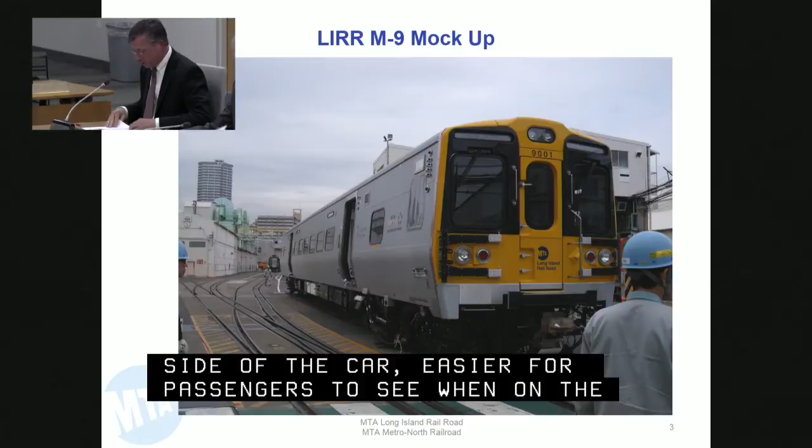Slide 2 shows the same mock-up car from the side. As you can see, it's very similar in appearance to the M7 car that Long Island and Metro North operate today.

The contract also has provisions for up to an additional 584 cars for Long Island and Metro North. Long Island's first option for an additional 88 cars is funded in the 2015 to 2019 program. The 92 base order cars, along with the first option for 88 cars, provides 180 cars that are intended to replace Long Island Railroad's existing fleet of M3 cars, which will have reached the end of their useful life.

However, because the East Side Access full funding grant agreement between MTA and FTA identified the 160 cars for East Side Access, the M9A cars will be purchased pursuant to a separate procurement with federal procurement guidelines. Metro-North will also have an option under the Kawasaki M9 contract for between 140 and 170 M9 cars, which are also funded in the 2015 to 2019 program.

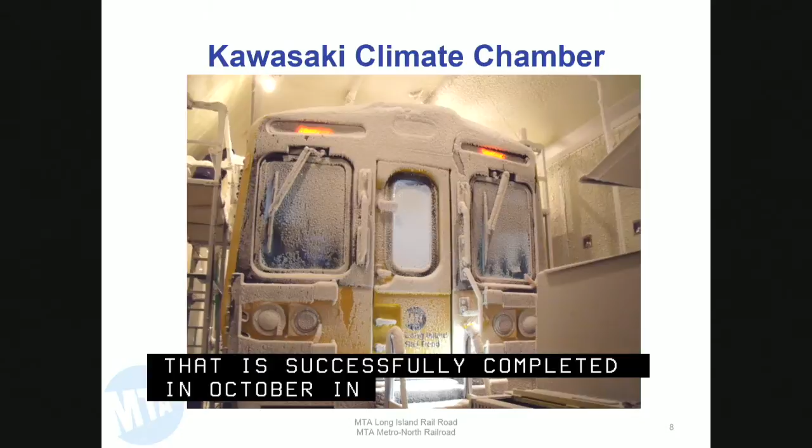Slide 7 also shows that the mock-up was subjected to a climate room test where it was covered with snow and soaked at temperatures as low as -20 Fahrenheit and as high as 105 degrees Fahrenheit.

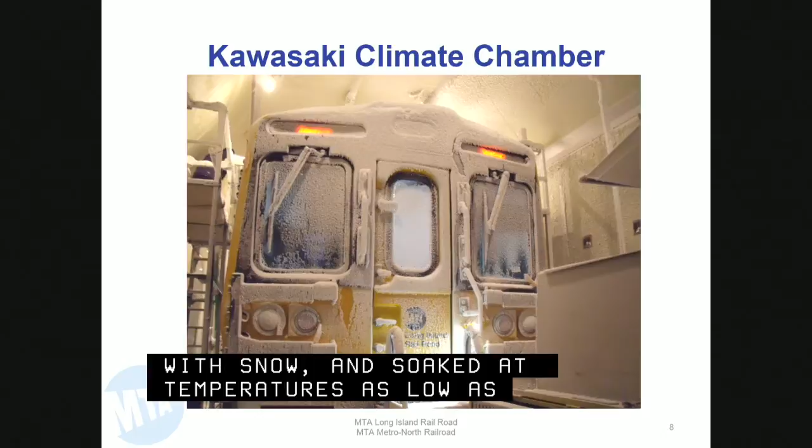Slide 8 shows the interior of the mock-up car. Please be aware that these seats are for mock-up purposes only and were only installed in the car to give it some sort of perspective of what the final design would look like. As you can see, the interior of the M9 car, as with the exterior, is very similar to the M7 design. And while close to the finally chosen M9 blue seat color selection, the colors of these seats are not exactly what the final design will be.

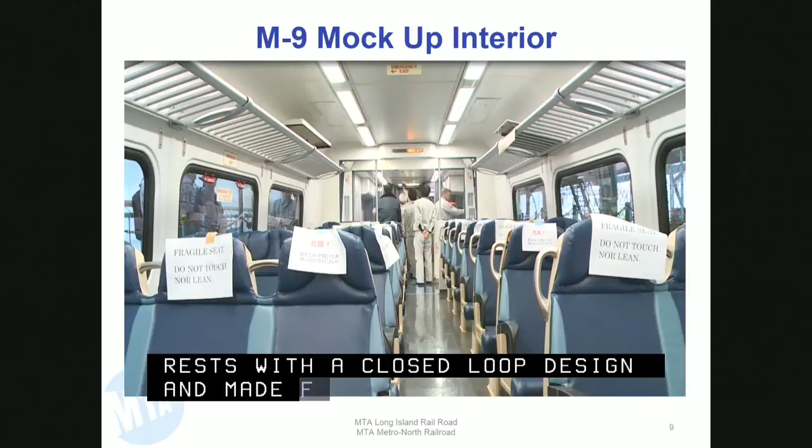And the seat backs will be in off-white. And finally, the age-old question: although not readily apparent in the picture, the M9 will have new and improved armrests with a closed-loop design, made from stainless steel, with a pad affixed to the top of the armrest for passenger comfort. And as a sustainability initiative and customer amenity, M9 cars will be equipped with LED lighting, as you can see in the picture.

Mr. Albert: Is there any physical difference between the Long Island Railroad's and the Metro-North's version of M9, and is there a difference between the M9 and the M9A car? Or is that physically just an additional order? As far as the car shell is concerned, it's identical to the M7 car because of the tunnel restrictions. The clearance diagram - Long Island has the most restrictive clearance diagram - ultimately drives the Metro-North car because it's a joint procurement with one car body.

The 12-month look ahead: for all intents and purposes, the railroad's project teams over the next year will be consumed with holding FDRs, conducting truck testing, performing the various system qualification tests, approving the first article inspection for each and every system in the car, and finally inspecting the 14 pilot cars that will be manufactured in Japan and will come to the United States for testing.

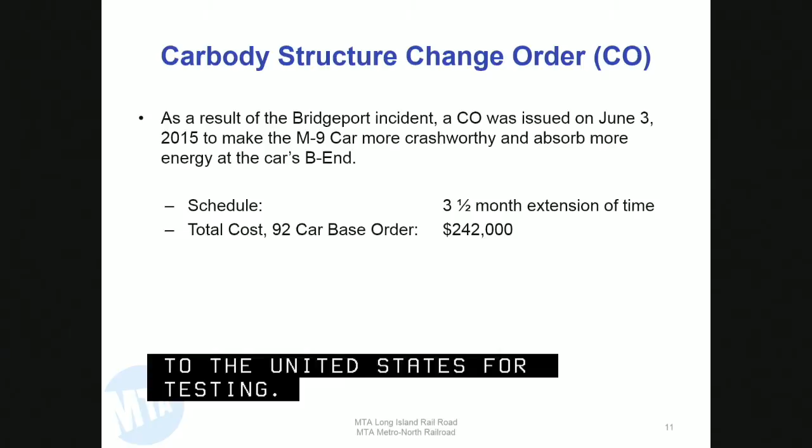We have completed and fully executed only one change order on the project to date, and that was a safety and crash survivability enhancement to the structure of the car, more specifically to the B-end where the married pairs are coupled together.

As part of our constant lessons learned approach to project management on M9, we reviewed Metro-North's Bridgeport incident, and since we were in the early stages of the M9 design, we thought about what we could design differently in our car to lessen the damages should a similar incident occur.

In Bridgeport, the F end of one M8 car came in contact with the B end of another M8 car that had derailed. Since we were in the early design phase of the project, this came at a relatively small cost to the overall project and greatly improved the safety of the train. The total cost of the change order was $242,000, and as part of the negotiation, we granted a 3.5-month time extension to the project.

The next slide shows some of the M9 car improvements over the M7 fleet. As far as increased safety is concerned, the car will enter revenue service with a fully operational positive train control system. With regards to security, the M9 car will be equipped with 8 cameras in the passenger area of the car, which will provide 100% coverage within the car.

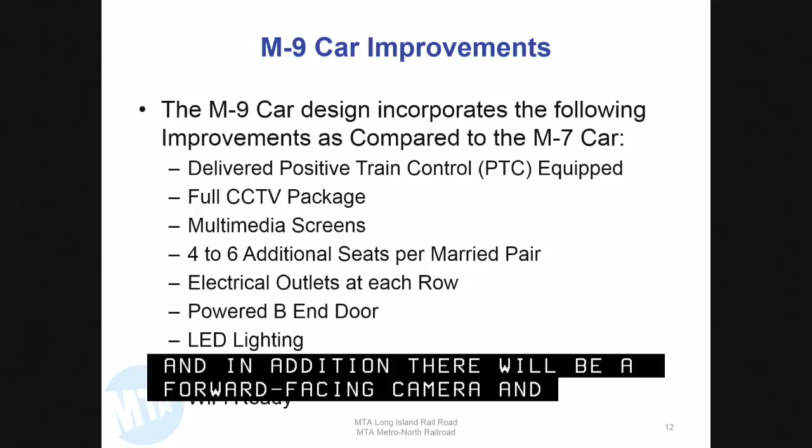In addition, there will be a forward-facing camera and an in-cab camera. There will also be 4 multimedia screens located in the car, and the M9 car will have between 4 and 6 additional seats over the M7 fleet, with each row of seats having an electrical outlet similar to the M8 car. As part of a sustainability initiative and customer amenity, the car will be equipped with LED lighting.

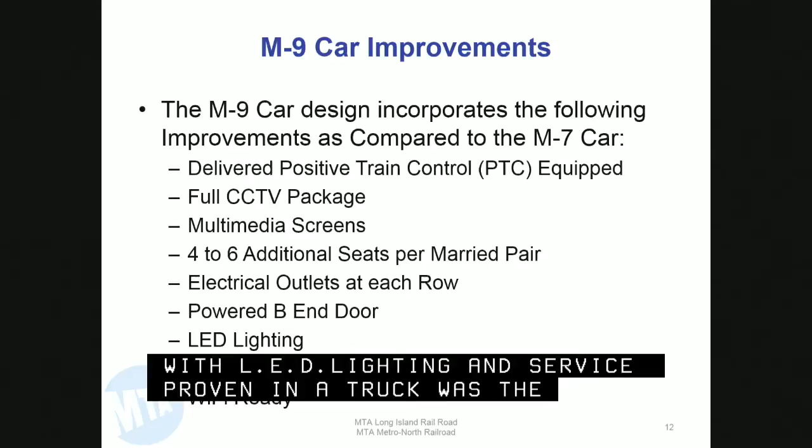The service-proven and robust M8 truck was the basis for the Kawasaki design for the M9 car and will provide superior ride quality. It's a heavier, stronger design—it'll be more maintainable and it'll last longer.

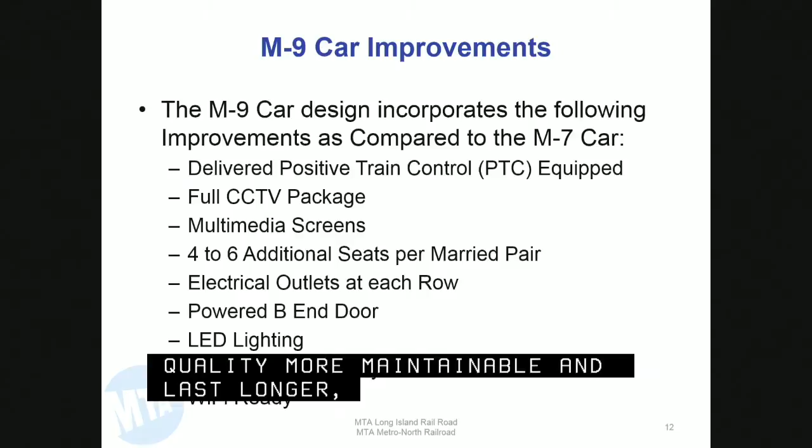Since it's not known what technology will be available in 2018 when the cars arrive, we are having the M9 car built what we refer to as Wi-Fi ready, or whatever that technology may be by 2018. We'll be prepared to go without having to tear the car apart to make a change.

Open issues on the next slide: weight has been an issue on the M9 project since contract award. The M9 has some very ambitious weight requirements. However, as in every car procurement, and the M9 is certainly no different, the authority and the car builder must work together to resolve weight issues without ever compromising safety, car reliability, and maintainability.

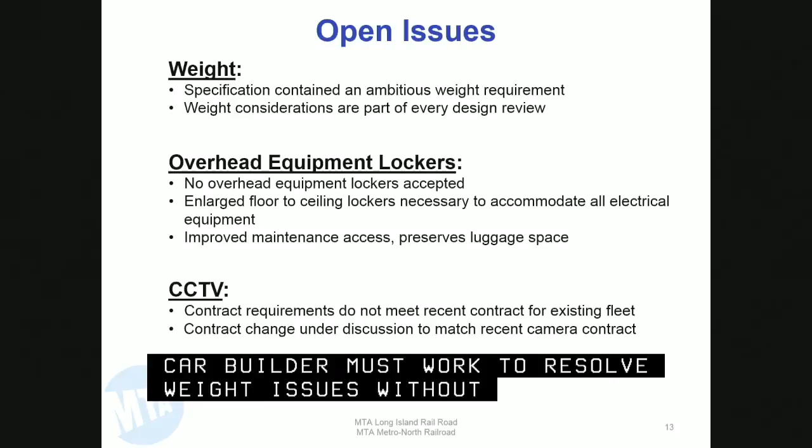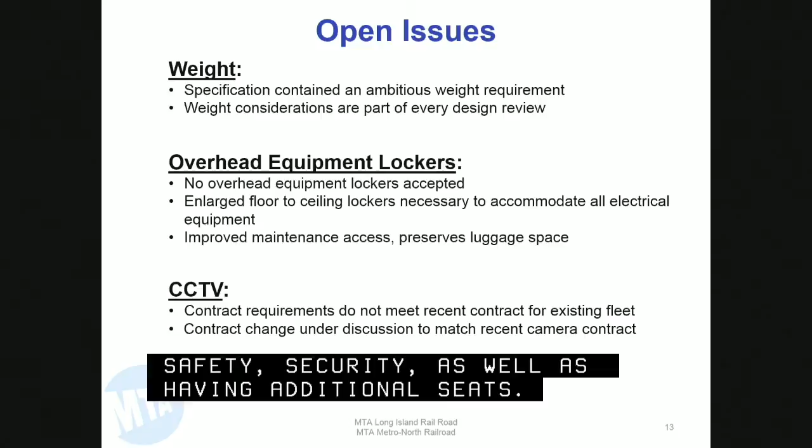The M9 has added a lot of electronic equipment into the car for safety, security, and customer amenities, as well as having additional seats. Unfortunately, the M9 car was already starved for space, and putting these additional items into the car has only made the matter worse. To fit everything into the car, Kawasaki designed overhead equipment lockers.

Unfortunately, these overhead equipment lockers were unacceptable for a number of reasons, such as safety, vandalism, and maintenance, and that design was rejected. As a result, the railroads are working closely with Kawasaki to reconfigure the interior of the car to enlarge the existing electrical locker to replace the overhead lockers that were originally there. One benefit of this is that we'll be able to restore overhead luggage rack space that had previously been removed for the overhead equipment lockers.

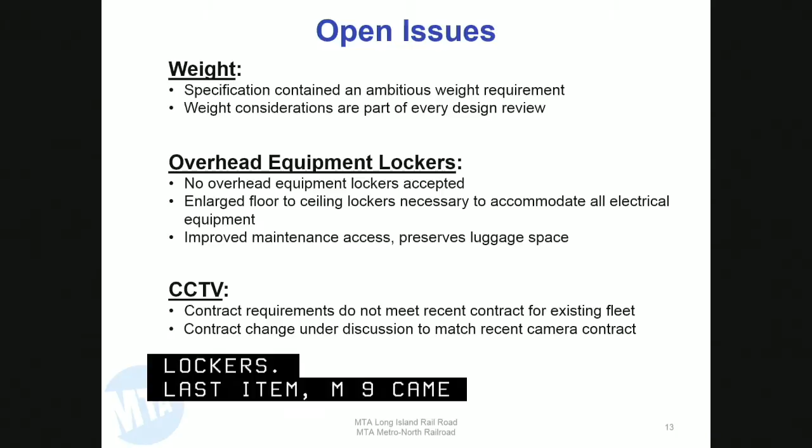The last item: the M9 car came with a limited CCTV system, which was just one forward-facing camera with a 7-day recording requirement. We did a contract change order, which we're progressing now, to have the M9 car outfitted with CCTV capabilities the same as the rest of the Long Island and Metro-North fleet.

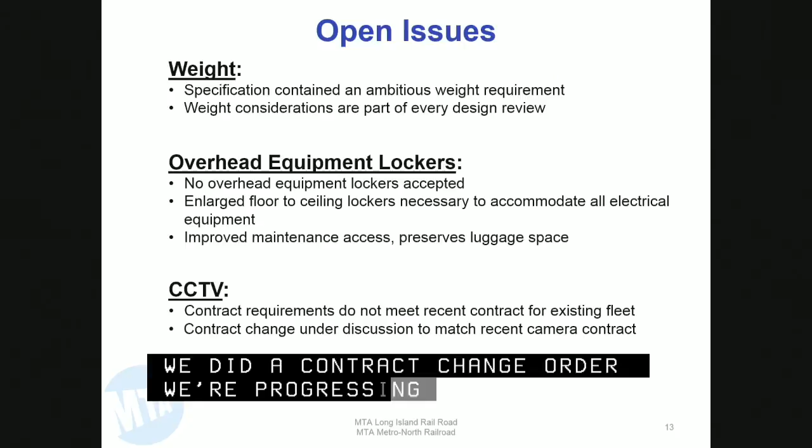The next slide discusses a new component to the railroad's procurement added in the M9 project. Understanding the need to limit, to the greatest extent possible, the amount of sole source procurements we have to execute in the aftermarket following delivery of the cars, the M9 contract contains a 40% goal that all parts designed into the car have to be commercially available off the shelf or available from multiple sources.

With the assistance of a consulting firm, the railroads have continually challenged Kawasaki and their subs. Today I'm happy to report that Kawasaki is currently projecting this percentage to be 53%. There still remain a couple of suppliers who haven't participated to the level that they could, so we continue to challenge Kawasaki and them.

The last page, which is rather busy, is a schedule identifying the three projects we are currently managing. The first column shows the Long Island Railroad M9 base order for 92 cars, which, as I said earlier, was awarded in September 2013, and we're in the midst of the 39-month design phase.

Six months of pilot car testing starts in January 2017. There'll be 8 cars at Pueblo for 3 months, and then 6 cars will join those 8 cars at Long Island for another 3 months. In the true fashion of a pilot car program, we have a 5-month hiatus to incorporate any modifications that come out of pilot car testing into the production cars.

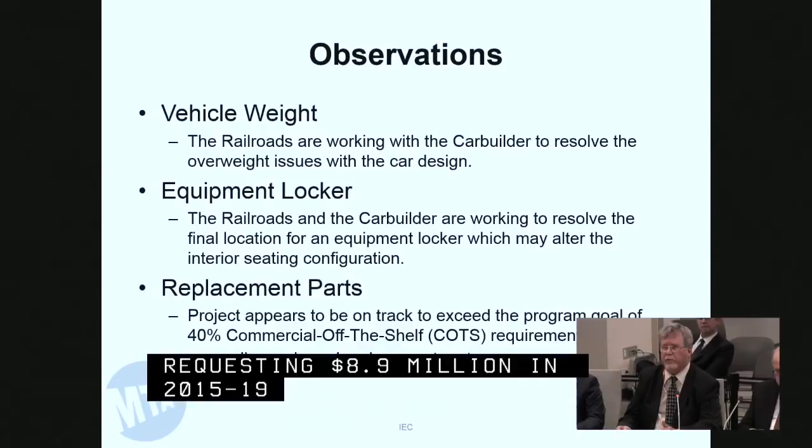Replacement parts project - we continue to be ahead of the goal of 40%, and all the vendors appear to be cooperating now. That part of the project appears to be moving fine.

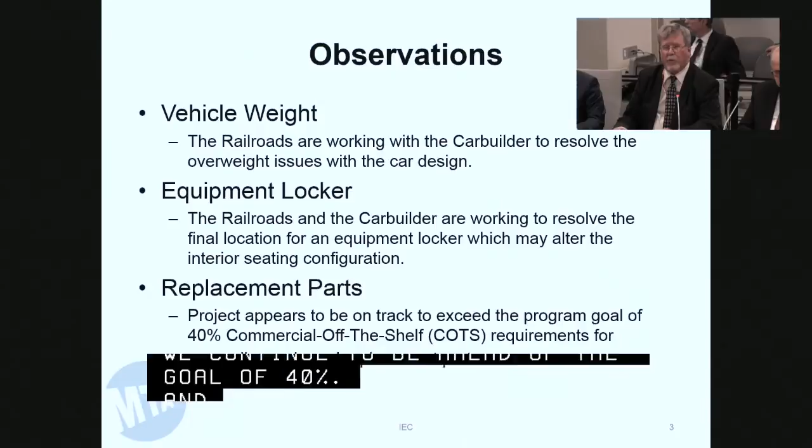Critical milestones - the issue of the vehicle weight needs to come to a conclusion. We're now proceeding into the final design reviews, and that means we'll begin to lose our opportunities to reduce the weight. The schedule for the final design reviews is tight. If we see any slippage, it may have an impact on the delivery of the equipment. That's the conclusion of my report.

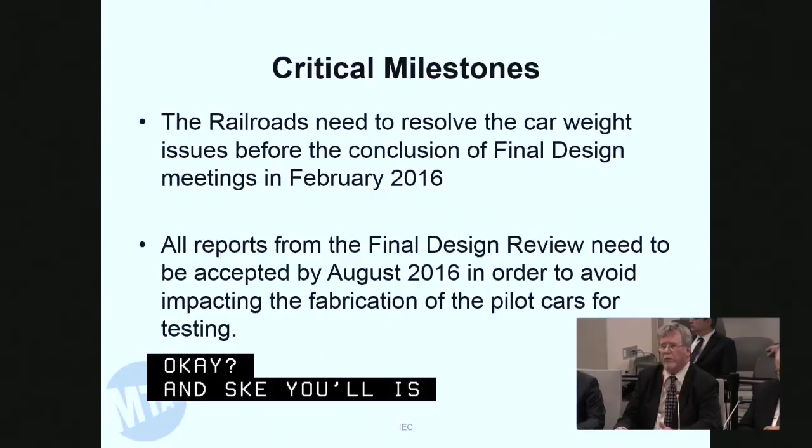Any questions of the independent engineer? If not, we'll move on to the Long Island Railroad Capital Programs update.

Rich Oakley. Good afternoon, I'm Rich Oakley, Chief Program Officer for Long Island Railroad. With me today is Glenn Greenberg, the Deputy Chief Engineer. He and I will be presenting the update for Long Island Railroad's capital program, with focus on specific achievements and milestones.

This year we started early tracking our annual goals, and as you can see here, as of the end of October, we're just slightly below our goals, but surely we'll achieve a full 100% of our goals before the end of the year. In 2015, the Long Island Railroad reached several significant milestones.

To advance the first phase of mainline double track at the preliminary design level, we released a design-build contract limited to the initial civil and site work necessary to support the track infrastructure, which is to be installed by Long Island Railroad forces. With most of the retaining walls and earthwork now completed between Central Islip and Ronkonkoma, on August 27th the Long Island Railroad officially started the track work for Phase 1.

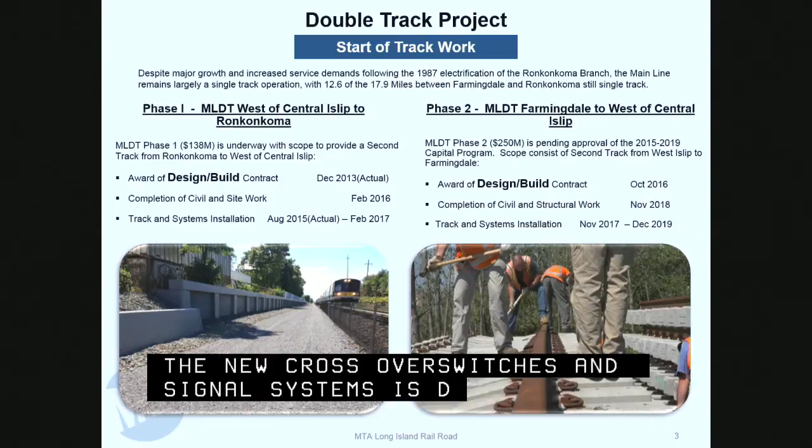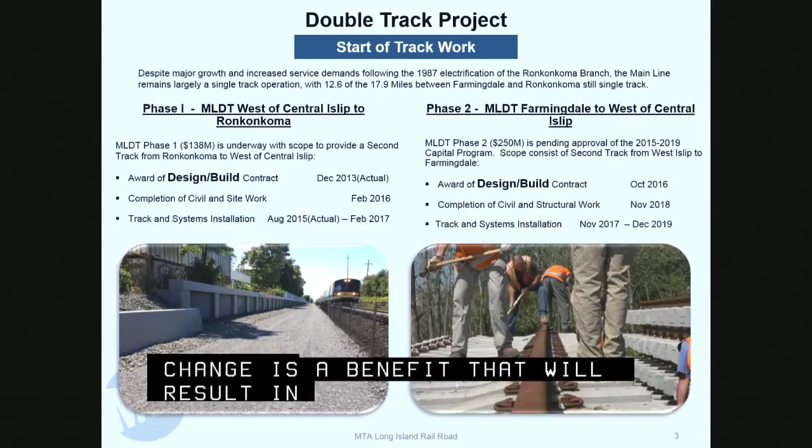This will simplify the signal system, wayside components, and eliminate the need for signal bridges. Although this change clearly is a benefit, it will result in a 5-month delay to the project. This impact, combined with the previously reported delay in getting the wetlands permit, has resulted in a total delay of 7 months. Phase 2 of mainline double track between Central Islip and Farmingdale is pending approval of the new capital program.

Another design-build project and milestone reached in 2015 relates to Jamaica capacity improvements and the reconstruction of Johnson Avenue Yard. The reconstruction is divided into 2 stages, the south half and the north half of the yard. Stage 1 involves the realignment of the south yard tracks and executing the initial civil site work necessary to make room for the Jamaica Station platform.

The track work required to support east side access was completed on August 23rd, and we are now in the process of advertising bids to construct a new platform.

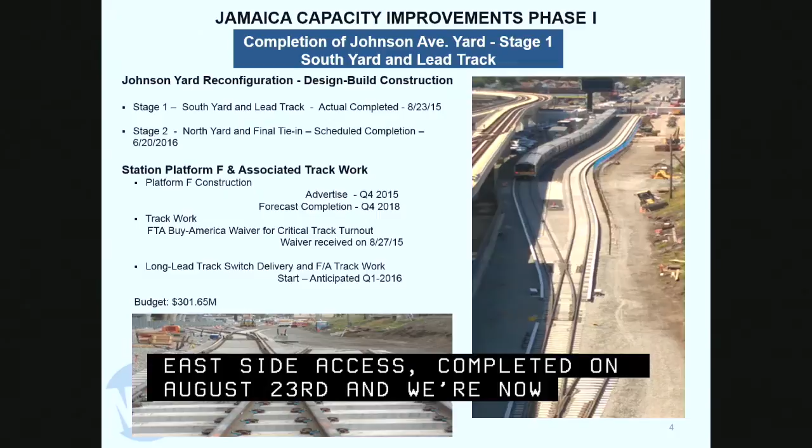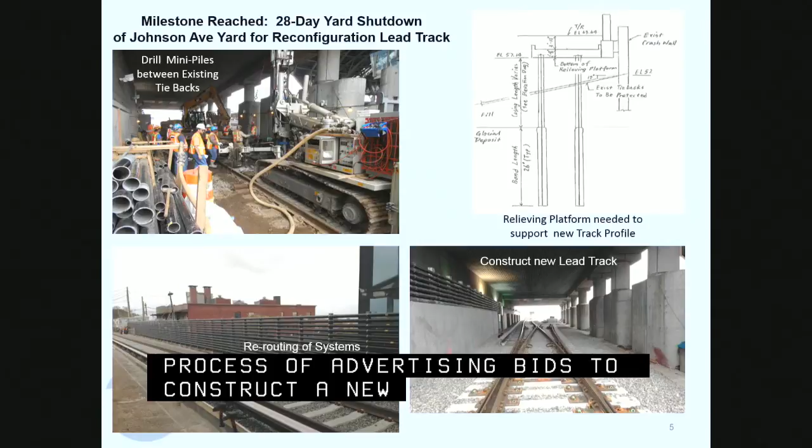Stage 1 consists of the reconstruction of the south half of the yard and the lead track, which had to be approximately 6 feet higher than it is today to meet the entry switch and the track profile for the new platform. The work required a 28-day shutdown of the entire yard so that we could remove and reconstruct the lead track and lattice section of the south yard.

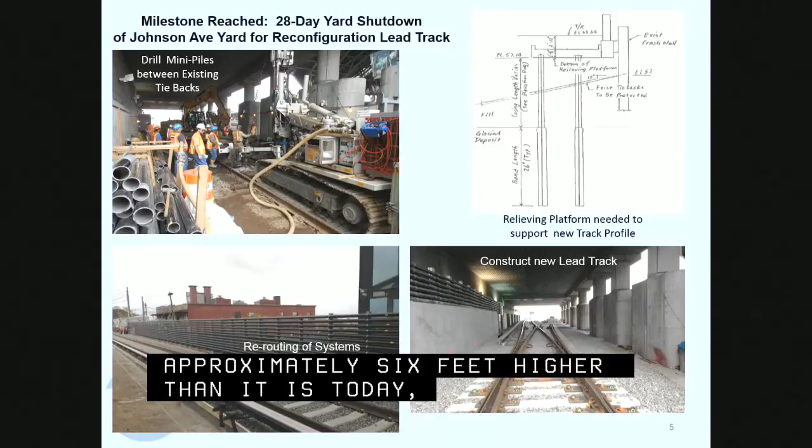During that time, the contractor and Long Island Railroad worked around the clock to complete a very aggressive schedule, with work consisting of the rerouting of utilities, removing the existing lead track, completing 76 micropiles and a 300-foot-long relieving platform, and strengthening the Sutphin Boulevard Bridge to take on the extra load of the raised track. We waterproofed the bridge, and we had to reinstall the lead track along with 3 new switches.

Colonial Road improvements. This project consists of the replacement of the 115-year-old Colonial Road Bridge, as well as extending the existing pocket track on Great Neck, just east of Great Neck Station. Using a design-build contract again, we were able to close the old Colonial Road Bridge on March 30th and quickly advance construction. Utilities were relocated and the existing Colonial Road Bridge removed over the weekend of June 20th. During the weekends of August 22nd and September 26th, we were able to construct the precast arch required to support the new bridge. We're about to show you a little quick video.

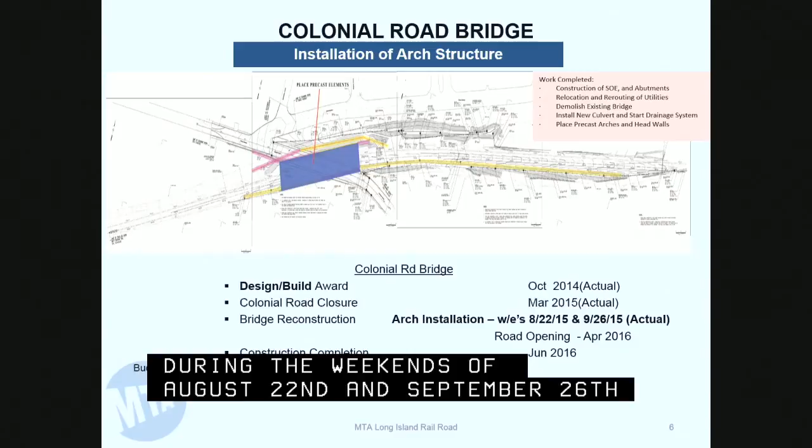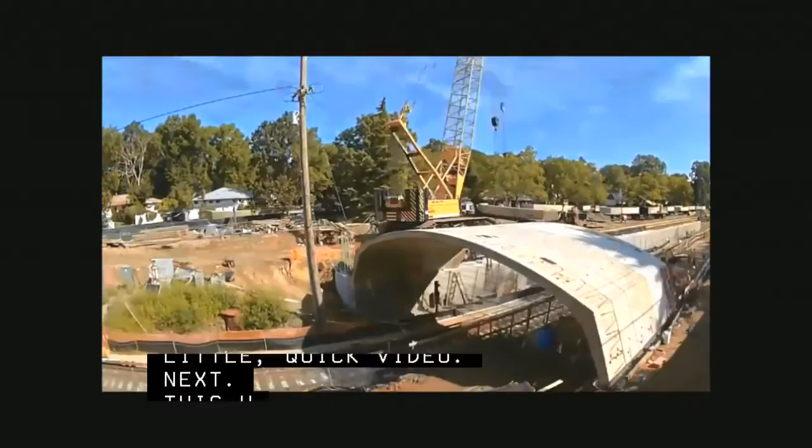This work was performed during a 2-weekend track outage between Great Neck and Port Washington. The arches used are part of a pre-engineered system commonly used for roadway crossings over highways and railroads. The archway being constructed consists of 84 precast concrete units spanning 52 feet, each weighing 42,000 pounds. The total length of the arch is 324 feet to support the road alignment, which crosses diagonally over Long Island Railroad tracks.

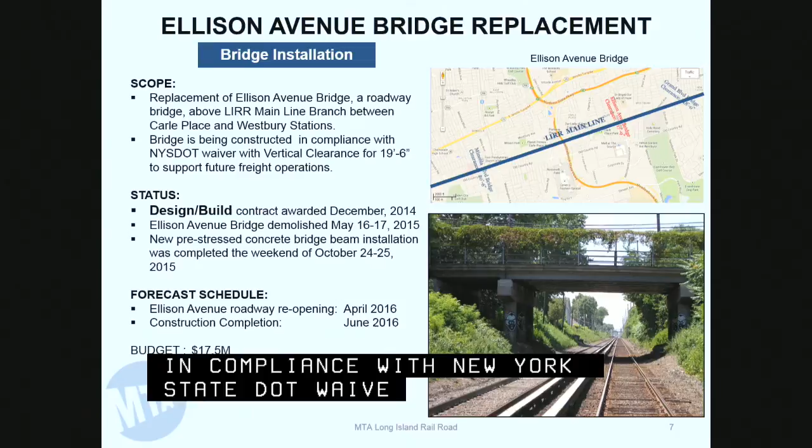Yet another design-build project is the replacement of Ellison Avenue Bridge, a roadway bridge above our main line track between Carle Place and Westbury stations. The bridge is being constructed in compliance with New York State DOT waiver with vertical clearance of 19 foot 6 inches to support the future freight operations. The vertical clearance of the old bridge was only 17 foot 9 inches. The additional bridge clearance was made up by raising the roadway and using a leaner superstructure consisting of pre-stressed concrete beams.

The Ellison Avenue Bridge was demolished the weekend of May 16th. New bridge structure was erected during the weekend of October 24th, and the roadway is scheduled to reopen April 2016.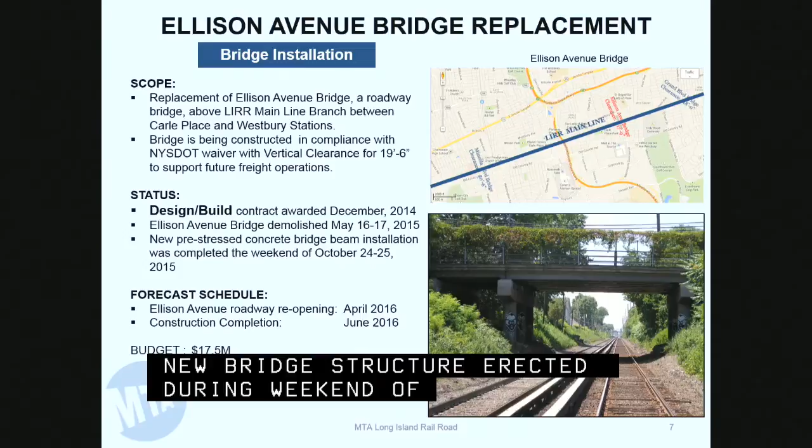This is another quick little video. The first half of the video is the demolition of the bridge, and the second half is the reconstruction of the bridge that took place over those 2 weekends. It consisted of 12 precast concrete beams that sit side by side and are grouted together by adjoining rebar, or what we call shear keys.

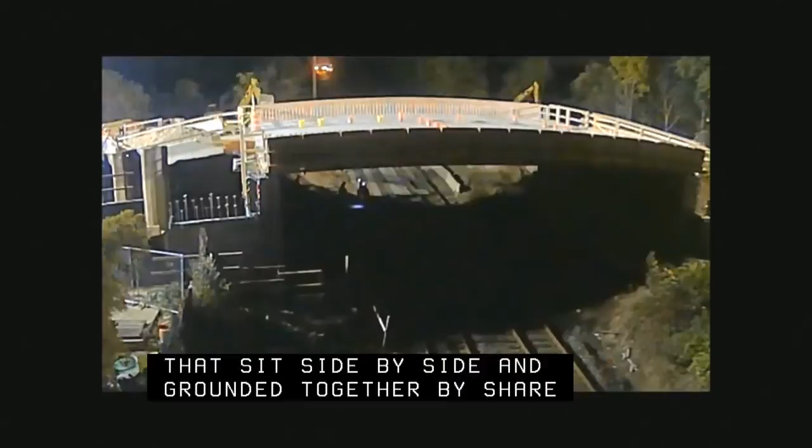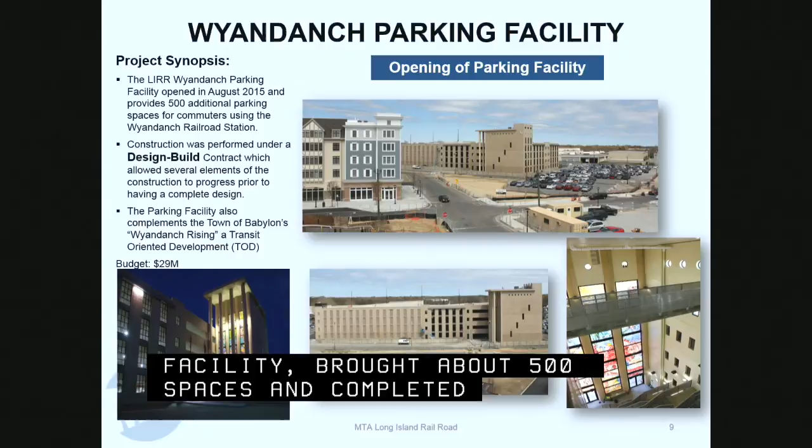Other milestones were the opening of Massapequa Station improvements, which we opened on July 23rd. A month later, we opened the Wyandanch parking facility, which brought about 500 additional parking spaces. Construction was performed again under a design-build contract, which allowed several elements of construction to progress ahead of the design. The facility was completed from start to finish in 16 months. The parking facility also complements the town of Babylon's Wyandanch Rising, a transit-oriented development.

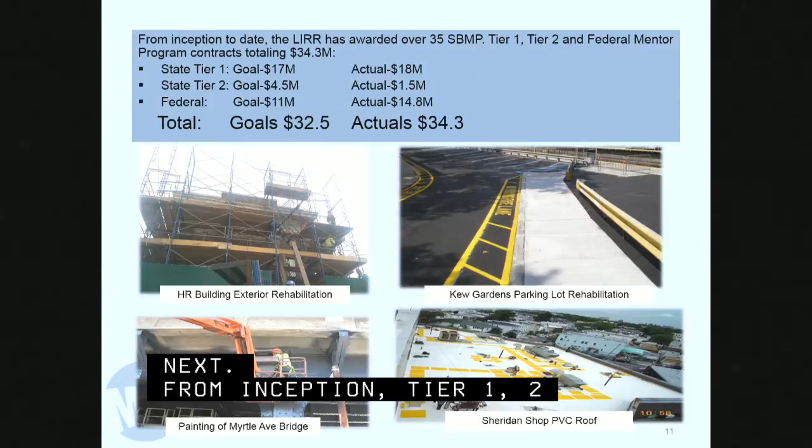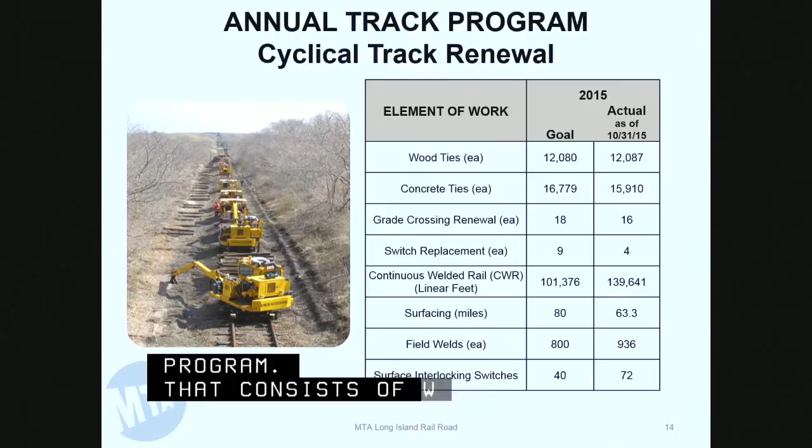The cornerstone of our state of good repair is our annual track program, a very robust program this year. It consists of cyclical replacement of components such as wood ties. Other components such as continuous welded rail are changed out on a tonnage basis to ensure that they're replaced before the end of their fatigue life. We're still working, but we're getting toward the end. We anticipate meeting or exceeding all of our goals.

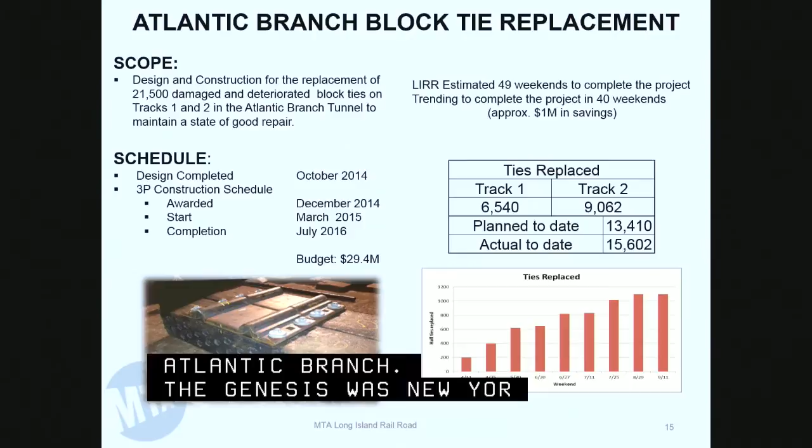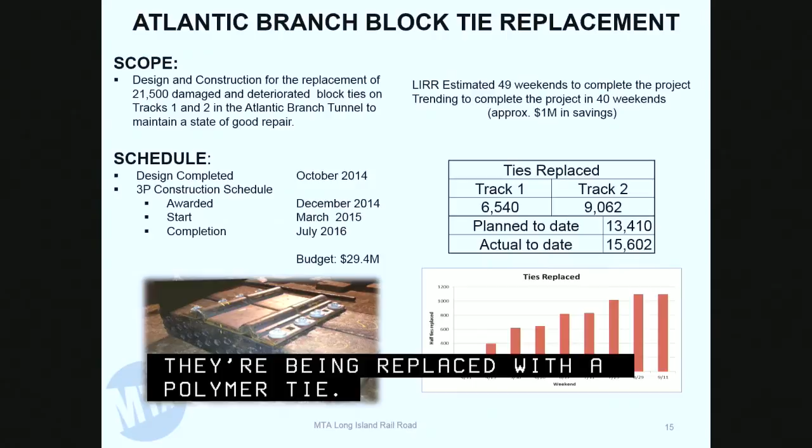A significant project kicked off this year is the Atlantic Branch block tie replacement. The genesis of this was a New York City Transit Authority project to replace deteriorated block ties without doing a full replacement of the entire tunnel track system. We're replacing just under half of the total block ties in the tunnel, between Dunton, just west of Jamaica, and East New York. The old wood ties are being replaced with a polymer composite tie that should provide superior life and protection against deterioration. Productivity has improved so we've cut the estimated weekends down from 49 to 40, resulting in substantial cost savings.

Next slide, please. We have a brief video.

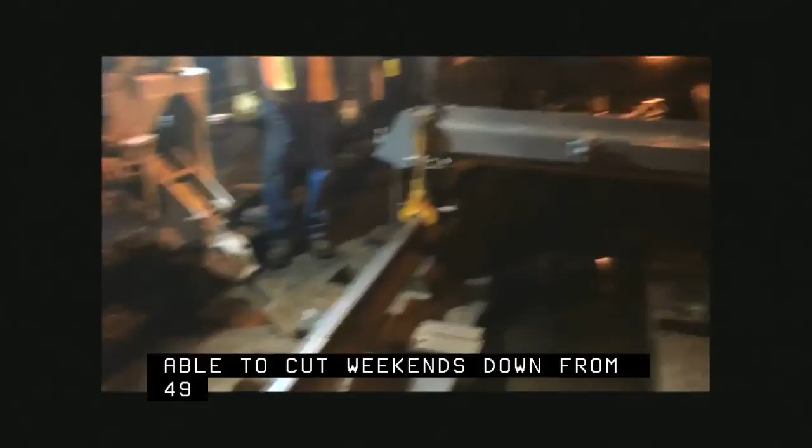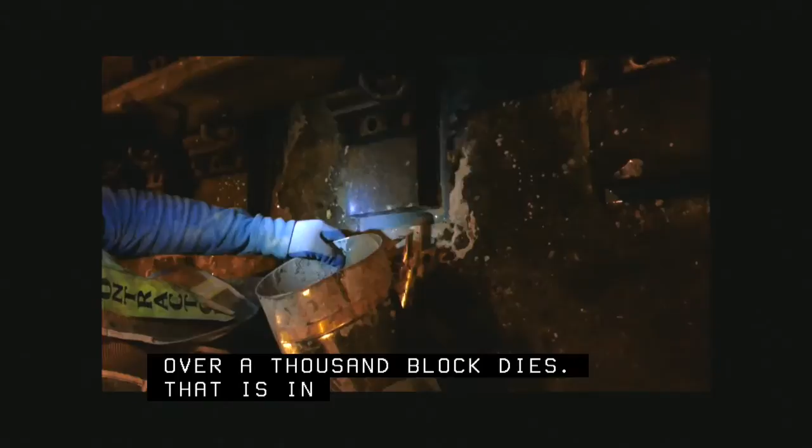The contractor came up with a very innovative way of removing the block ties. This has always been the slowest part of the process, and it's enabled us to achieve production of well over 1,000 block ties per weekend. That's sealing the ends of the ties in preparation for pouring the grout, which bonds the tie to the existing concrete base. That's the finished product.

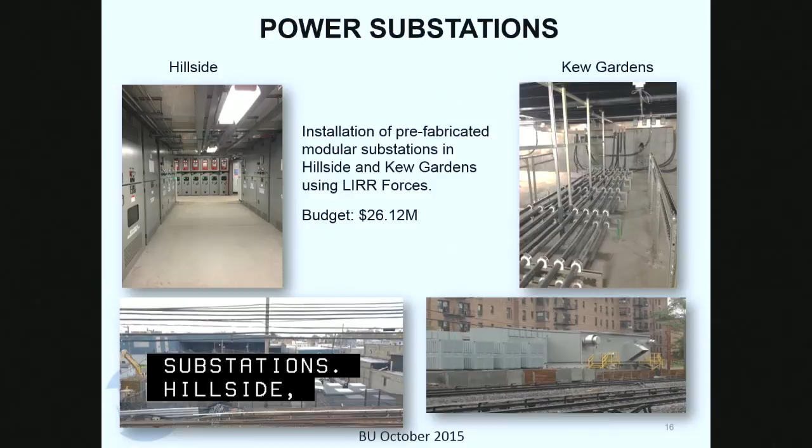Next slide, please. In 2015, we commissioned 2 new substations at Hillside and Kew Gardens, just east and west of Jamaica respectively. The substations are modular, installed on foundations prepared by a Long Island Railroad force account, and all the connections are also provided by force account.

Next slide, please. In 2015, we performed another series of state of good repair projects with the power system, replacing 446,000 linear feet of third rail protection board, 20 negative reactors, 4 signal motor generators which provide power to the signal system, and their associated programmable logic controllers.

Next slide, please. On the signal normal replacement, again it focuses on components within the system: batteries, switch machines, signals, equipment cases, relays, grade crossing gate mechanisms, and part of the ongoing TC Green cable replacement.

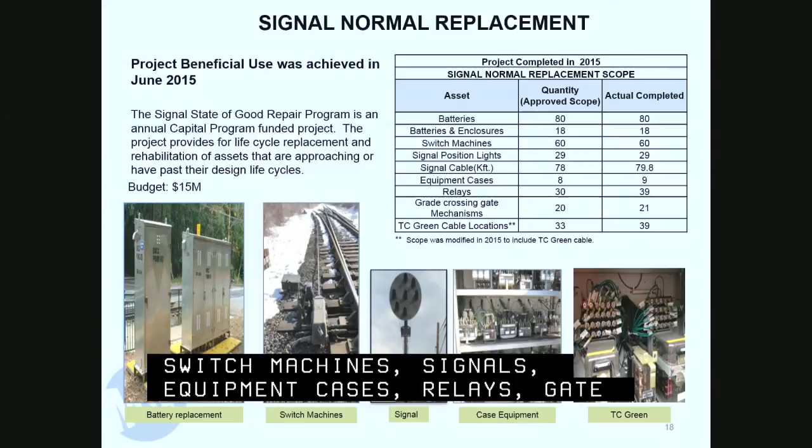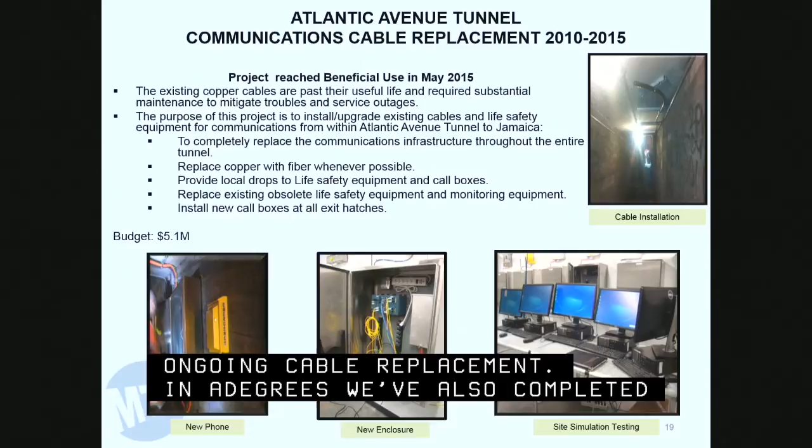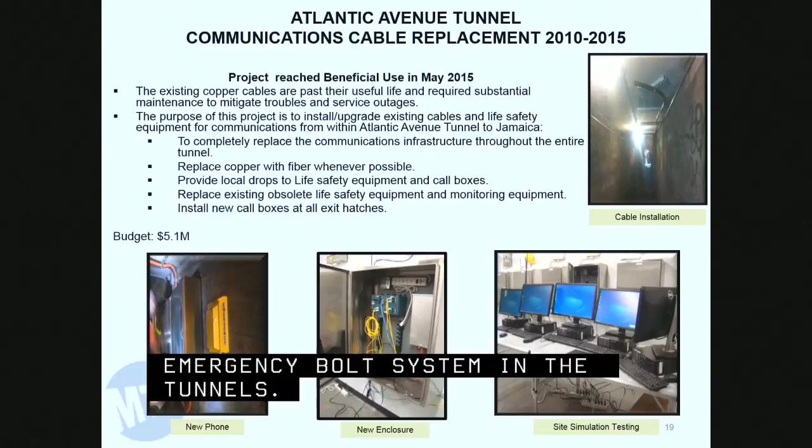Next slide, please. Finally, also in the Atlantic Avenue Tunnel, in addition to the block tie replacement, we've also completed replacement of the copper communication system and the emergency phone system in the tunnels. You can see some of the photos show the new phones with their enclosures and a testing system that was done to ensure proper performance.

That was it. Any questions?

Neil? Thank you. I'm referring back to page 44 to the annual track program. Can you just give a sense of how these goals are set and what percentage of the overall track system this program affects on a percentage basis annually? I can't interpret what 12,000 means. Is that 1%? Is that 0.1%? I just don't know.

Basically, wood ties have an estimated life of about 35 years. What we try to do is replace about 20% of them in a given stretch of track every 7 years, so that over the course of 35 years you've replaced all of them. It's basically a cyclical basis. Most years we do more wood ties than this; we were so caught up on our program that we were able to do a lesser amount this year. This year the main focus was on continuous welded rail, which has a different cycle based on tonnage, so it varies considerably and isn't really based on years. The goal setting for ties is tied to that 20% every 7 years cycle, purely based on a time cycle.

Any other questions or comments? Okay, now we'll have reports from the independent engineers. The report on mainline double track, Mohammed Mohammedina.

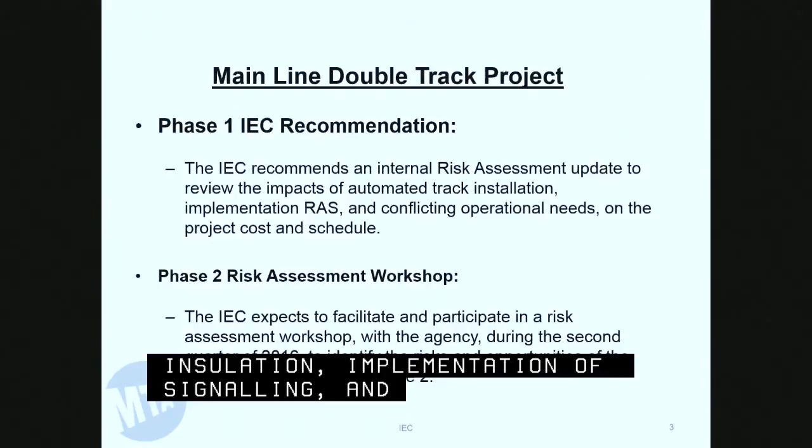Good afternoon. The IEC concurs with the agency's explanation of the schedule delays on the mainline double track Phase 1. Some schedule delays may be partially mitigated based on the availability of the automated track installation contractor. As far as budget, the expenditures to date reflect the correct percentage of project completion. The IEC awaits the Long Island Railroad's revised project cost estimate to review the potential impact of various project delays on the total project budget and contingency. As far as recommendation, the IEC recommends an internal risk assessment update to review the impacts of the automated track installation, implementation of reduced aspect signaling, and conflicting operational needs on the project cost and schedule. As for Phase 2, the IEC expects to facilitate and participate in a risk assessment workshop with the agency during the second quarter of 2016 to identify the risks and opportunities of the mainline double track Phase 2. This concludes the IEC's review of the mainline double track project.

Any comments or questions of Mohammed? If not, Mark Ghaznavi will deliver the IEC report on Jamaica capacity improvements. Mark? Good afternoon. The overall Jamaica Capacity Improvements Phase 1 project and the associated East Side Access Readiness projects are on schedule to be completed in time for East Side Access opening day service.

As you heard, the Johnson Yard Design-Build project is proceeding on schedule. The 28-day outage, during which a substantial amount of work was done, was completed on time. On the budget, the overall project is currently on budget, and expenditures to date reflect the percent of project completion. The IEC agrees with the project status reported by Long Island Railroad. The independent engineer is satisfied with the agency's risk mitigation efforts, for example, Long Island Railroad ordered some long lead items, including switches, through the third-party Johnson Yard Design-Build contract.

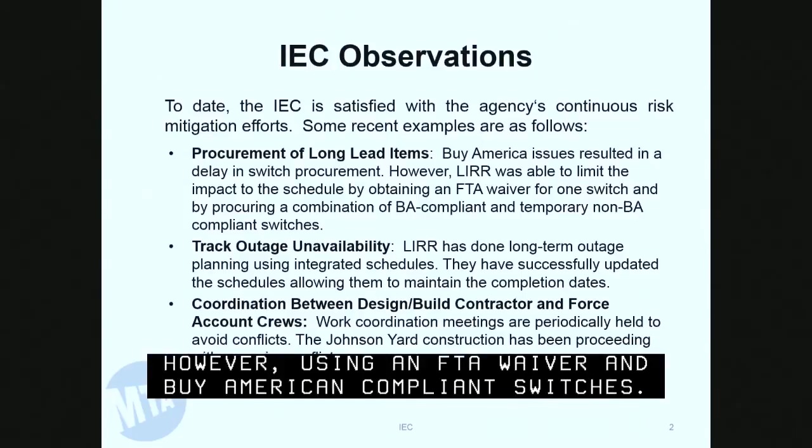Buy America issues delayed some switch procurements. However, Long Island Railroad expedited the procurement using an FTA waiver and a combination of Buy America compliant and temporary non-Buy America compliant switches. The availability of track outages is critical to the schedule. Long Island Railroad has done long-term outage planning using integrated project schedules. They have successfully updated the schedules as individual contracts are revised, which allowed them to maintain the completion dates.

On coordinating between the design-build contractor and the force account crews, coordination meetings are periodically held to avoid conflicts. Stage 1 of the Johnson Yard construction was completed with no major conflicts. That concludes my report on Jamaica capacity improvements.

Any comments or questions? Mr. Albert? Are the Jamaica improvements still, as we have heard over the years, forcing everybody bound for Brooklyn to change to Platform F, with most through trains going to either Penn or Grand Central? That is correct. Yes, there's been no change in that.

That die was cast quite a while ago. Yeah. So I was afraid of that. I mean, actually, when the first discussions of East Side Access and the restructuring of the Long Island Railroad Service Plan took place, when I was there...

So that means people that formerly had either a one-seat ride to Brooklyn or an across-the-platform transfer to Brooklyn will now have a major transfer to continue to Brooklyn, an up, over, and down, yes. Which means that you're going to run, I assume, a shuttle service from Jamaica to Brooklyn, and it would have to be at least as frequent as the trains that exist now.

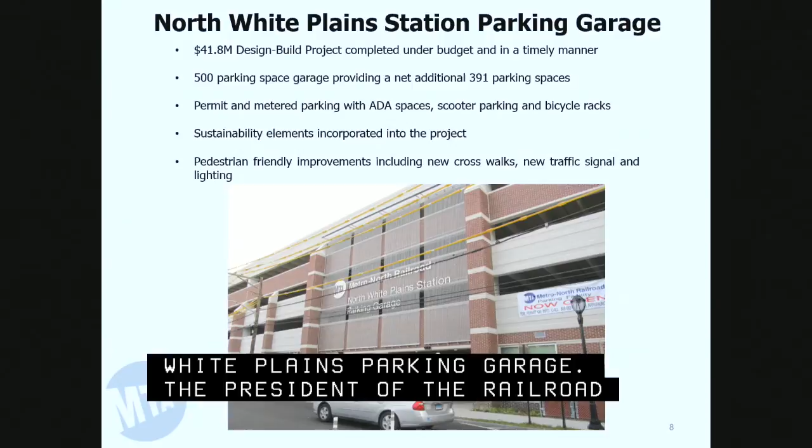It's a $42 million design-build contract. It was completed under budget in a timely manner. It is a 500-space garage, giving us about 400 additional parking spaces.

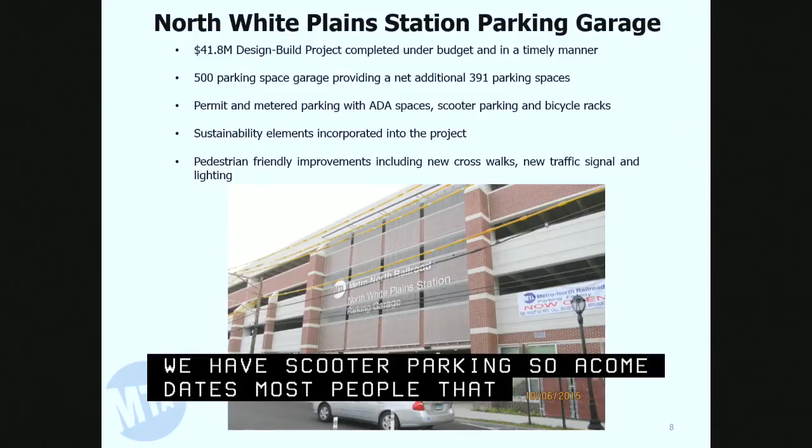We have permit and metered parking, ADA parking spaces, scooter parking, and bicycle racks, so it basically accommodates most people that want to access the station. We incorporated sustainability elements into it, like LED lighting, and we worked with the localities on improvements around the garage itself, including crosswalks, traffic signals, and lighting.

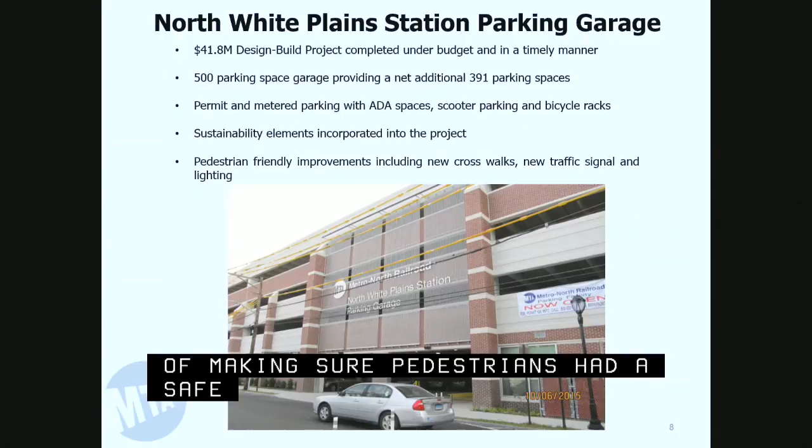This is because with additional cars coming to the site, there were concerns about making sure that pedestrians actually going to the station, not necessarily parking in the garage, continued to have safe access to the station. The garage is about 50% occupied, and we expect that to continue to grow. This is a very critical regional station for the railroad, so it should move itself towards full occupancy.

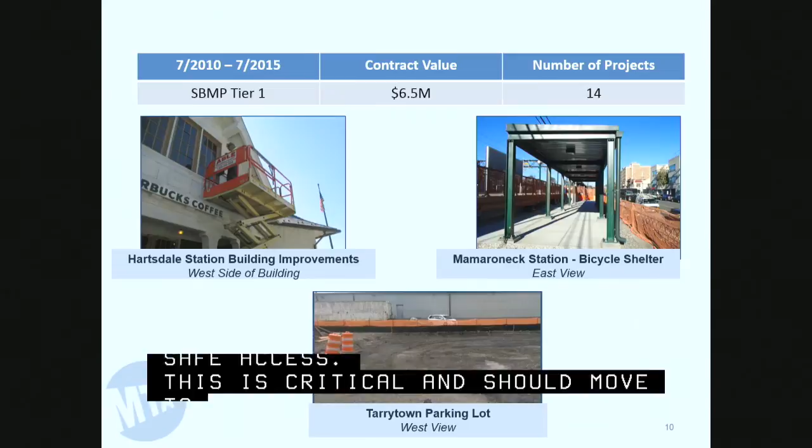The next 2 slides begin us into a small business mentoring program. The Tier 1 program is for projects about $1 million or less. We have a contract value of $6.5 million across 14 projects.

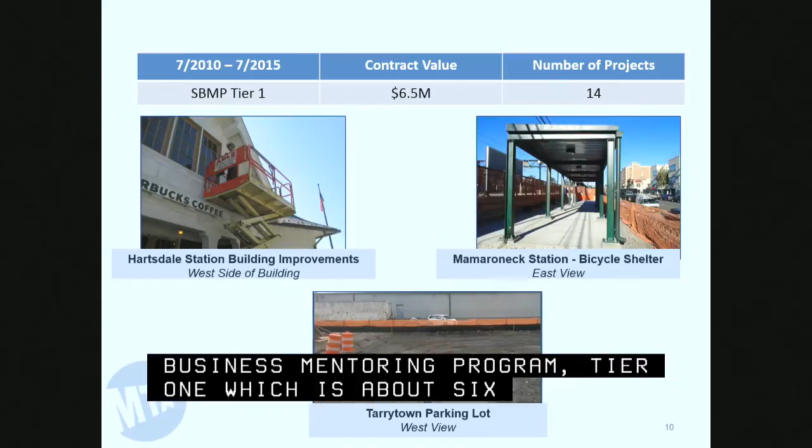These pictures show a couple of the ongoing projects. At Hartsdale Station, we're painting the exterior of the building and replacing the windows and doors. At Mamaroneck Station, where we're doing larger state of good repair improvements to the platform, ramps, and stairs, we've added a bicycle shelter.

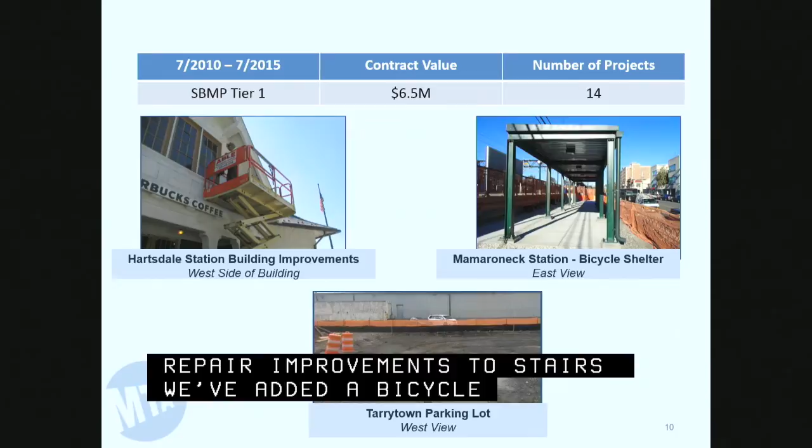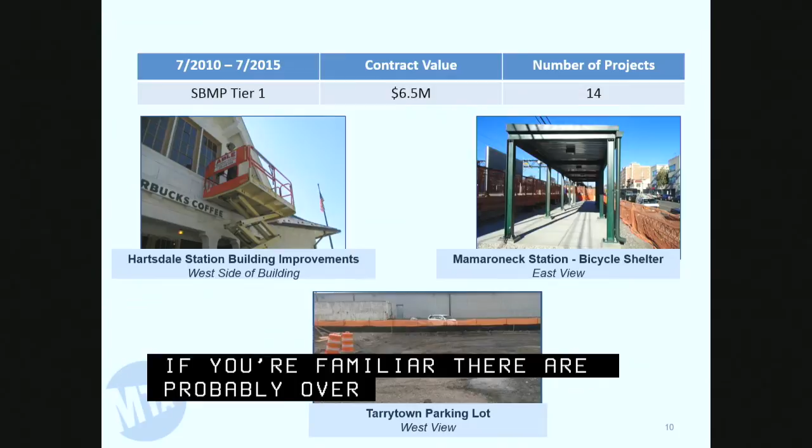If you're familiar with the Mamaroneck Station, there are probably over 50 bikes parked all over the place, and we're trying to get them into a central location so it doesn't impede pedestrians trying to get to the platform. And at Tarrytown, we're making improvements to a lot on the south side of the station on the outbound side.

The final piece is the 2015 to 2019 proposal. In all categories, including the federal program, which is up to $3 million, we've identified $39 million towards that program, to be executed either downstairs in Grand Central or at outlying stations' parking, structures, power, and shops and yards.

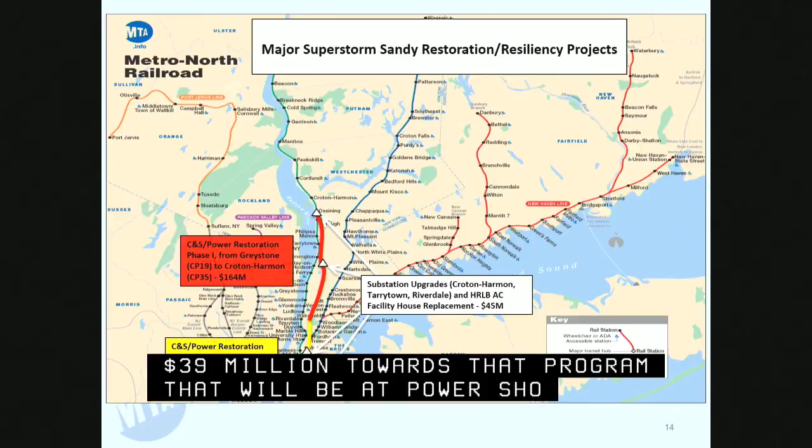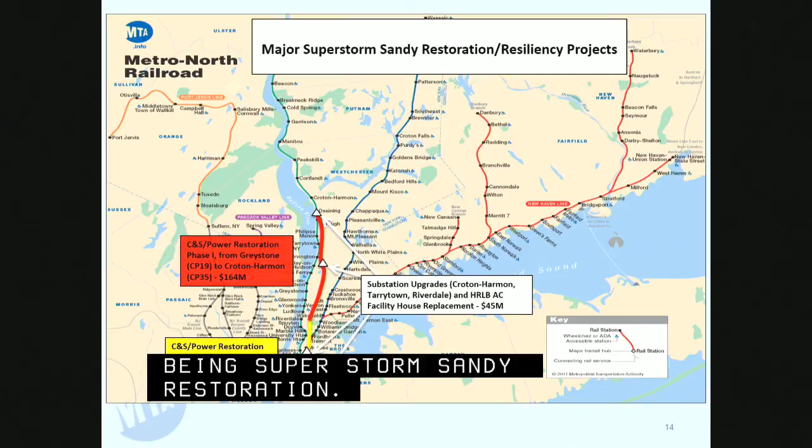We're going to go into some of our major projects, the first one being the Superstorm Sandy restoration. This slide shows the location of our two major projects. The first, along the Hudson Line, involves communications, signal, and power infrastructure improvements. The second, shown in the white boxes, involves replacing 3 substations and some AC facility houses at our Harlem River Lift Bridge.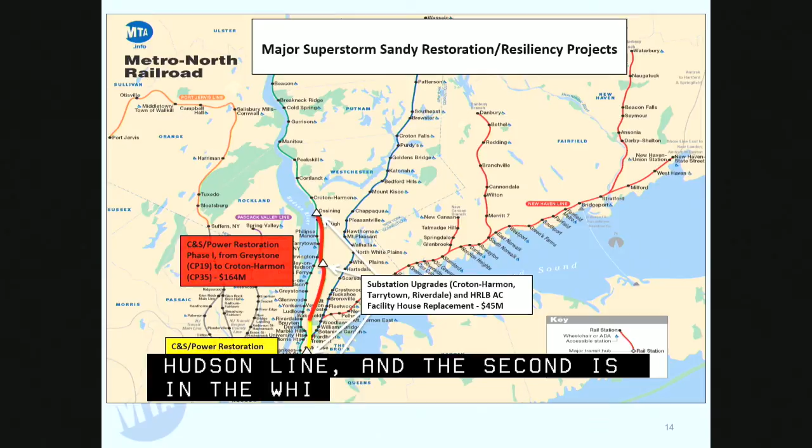The first one I'm going to talk about in a little more detail is the 30-mile power and C&S infrastructure restoration. This two-phase project is about $300 million, and we'll replace the communications and signal cable plant along with the traction power cables and components. You can see in the picture where we're going to be using a cable trough installation for the power and C&S cables as much as possible.

There will be some places where we'll be limited. Our standard is that the trough has to be 3 inches below the bottom of the tie and 30 inches away from that, so it doesn't interfere with our track maintenance.

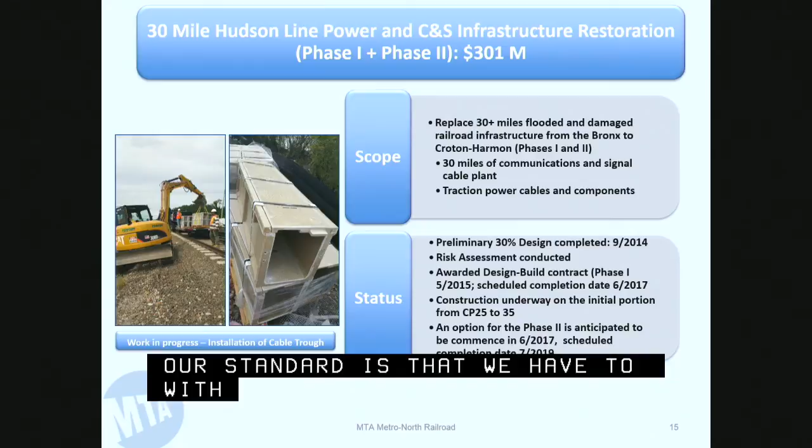So where we can do that, we will. Other places we'll have to find other methods such as direct burial.

The 30% design was completed in September of 2014. Because of the size of this, we did a risk assessment on that.

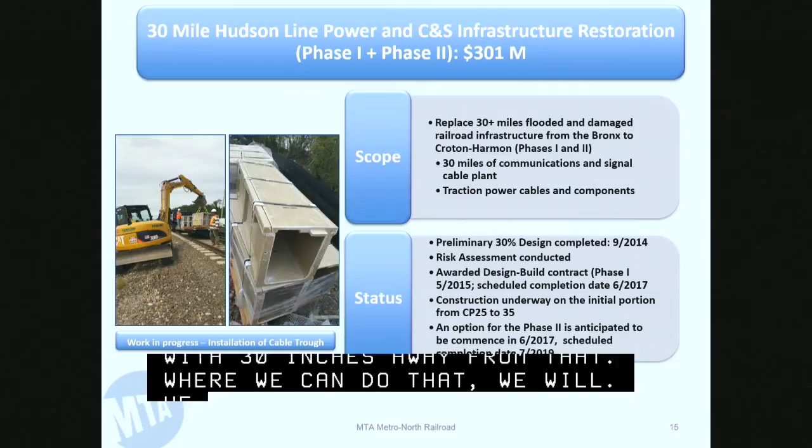We awarded Phase 1 in May of this year, with scheduled completion in June of 2017. The first phase is from Greystone to Croton Harmon. We are right now focused on Tarrytown, a little north of there, around the 25-mile post, to Croton Harmon. Phase 2, an option in this contract, is expected to commence in June of 2017 and complete in July of 2019.

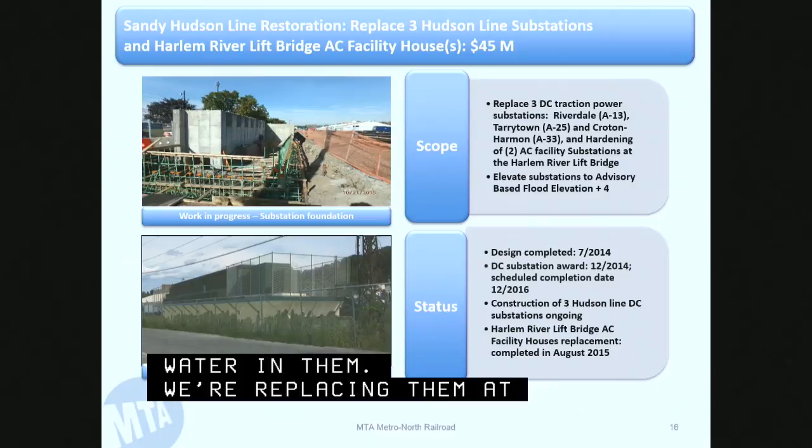The second item in the Sandy area is the replacement of 3 Hudson Line substations. These substations received 4 to 5 feet of water in them. We are replacing them at Riverdale, Tarrytown, and Croton Harmon. Additionally, we're hardening 2 AC facility substations at the lift bridge, which provide the power to lift and lower the bridge.

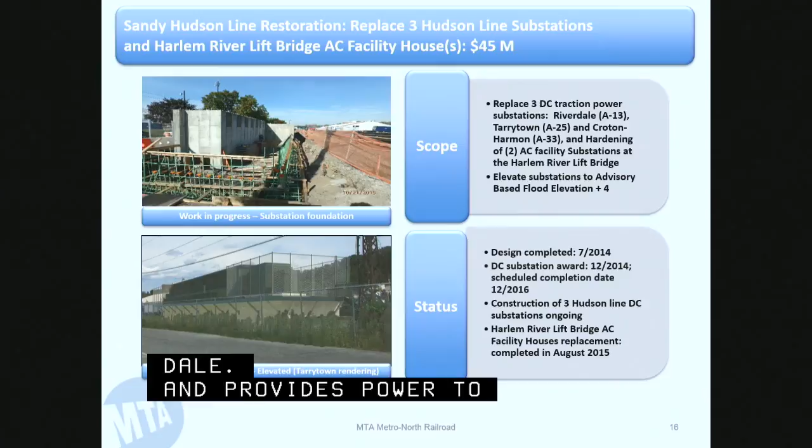All 3 substations will be elevated to an advisory-based flood elevation of plus 4, which basically means in most cases about 5 or 6 feet above grade. You can see in the picture depicting Tarrytown, in the final image at the bottom, that it's 4 or 5 feet above grade.

The design was completed in July of 2014. The DC substations were awarded in December, and we expect completion next December. The AC facility houses were completed in August of this year.

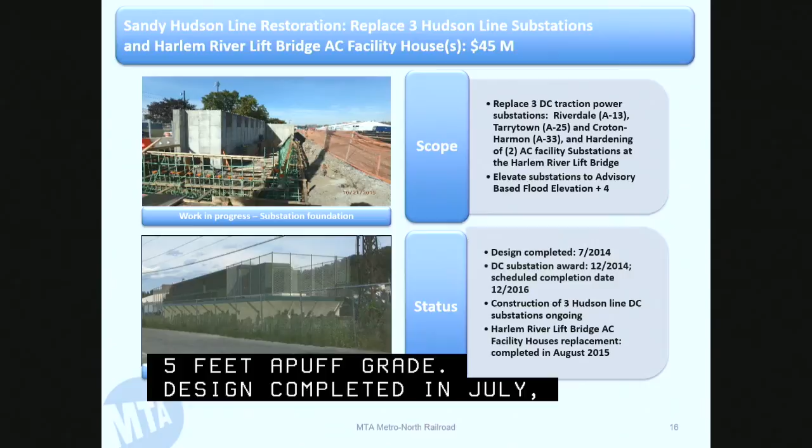We've constructed a new coach shop and a new locomotive shop. Largely, these have all been done using a design-build methodology. When we're done with Phase 5, which is the phase we're in now, we will have spent about $1.2 billion in year-of-expenditure dollars.

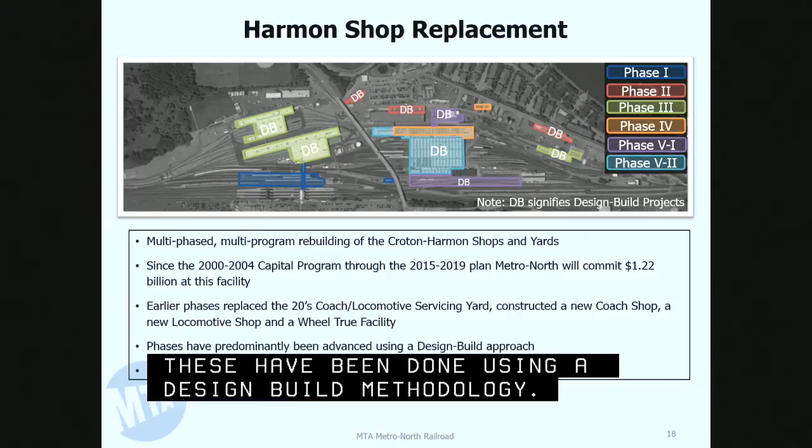Also in this stage, we'll be building an EMU annex on the west side of the plant, including a wheel and axle shop, carpentry shop, lockers, and lunchroom. The importance of advancing this part of the work is that it allows our mechanical forces to continue working in the present building. Once we complete the EMU annex, we'll move that work there so there's no interruption in service by our mechanical forces on the fleet.

The final phase of the mechanical department's needs at Harmon is Stage 2, which will be advanced with the 2015 to 2019 capital program. That work, replacing the vehicle bays and doing all the different truck and HVAC shops and training department, will commence in 2018.

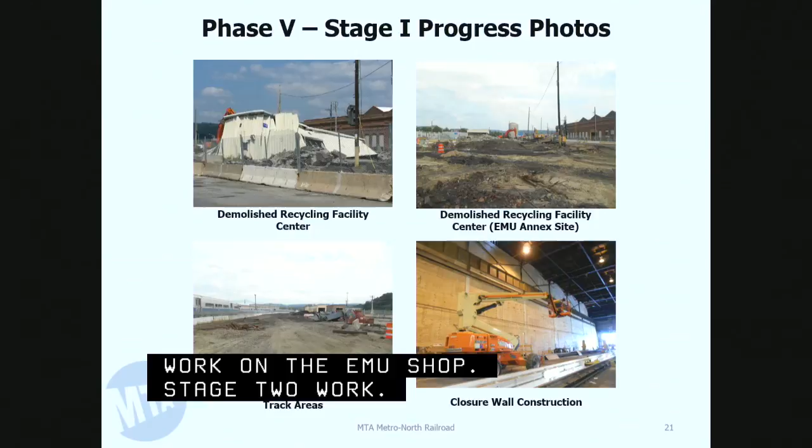On the next slide we see some progress photos for Stage 1. Largely it's been demolition of existing buildings or shops to move them out of the way. The recycling facility, shown in the top two slides, will provide the real estate for where the EMU annex will be constructed. On the bottom left, we demolished a blowshed and some track on the north side, which will allow us to extend the consist tracks in that facility to the north.

One of the things we had to do as part of this project, since this is an ongoing shop facility, is build a closure wall, which allows us to maintain the existing building and keep our mechanical forces working in that building.

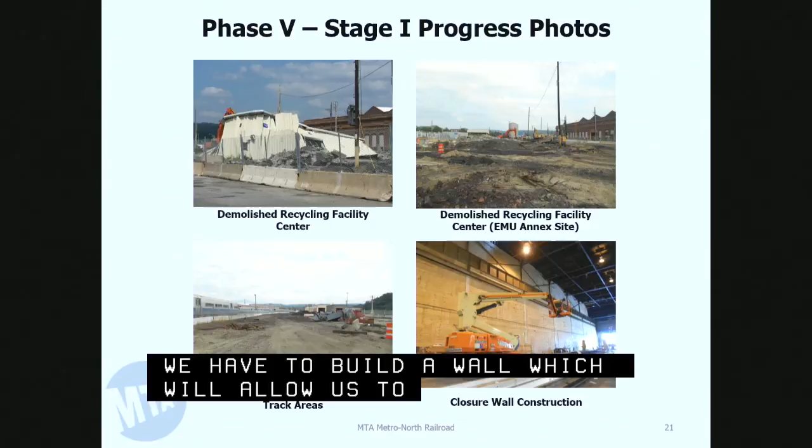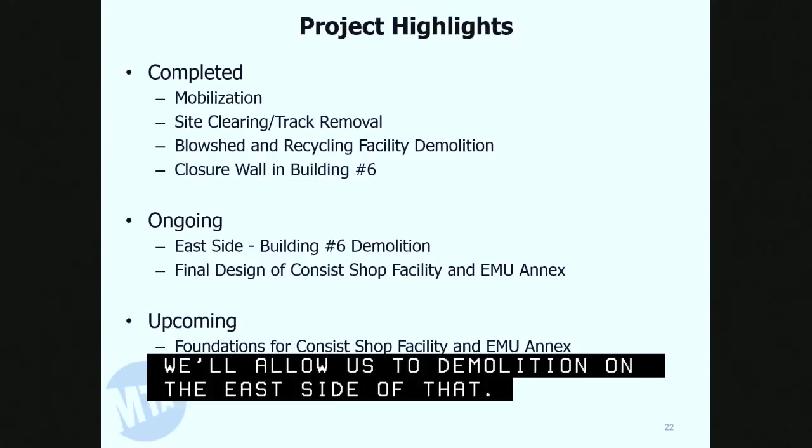We built the closure wall, that's been completed, and we'll be able to do demolition on the east side, which will allow us to put the consist facility tracks there. Highlights completed include mobilization, most of the clearing, and the closure wall. We're now beginning to demolish Building 6 on the east side, and working on final design since this is a design-build project. We'll begin foundation work in the first quarter of 2016 and begin structural steel erection in the second quarter of 2016. I'll be happy to answer any questions.

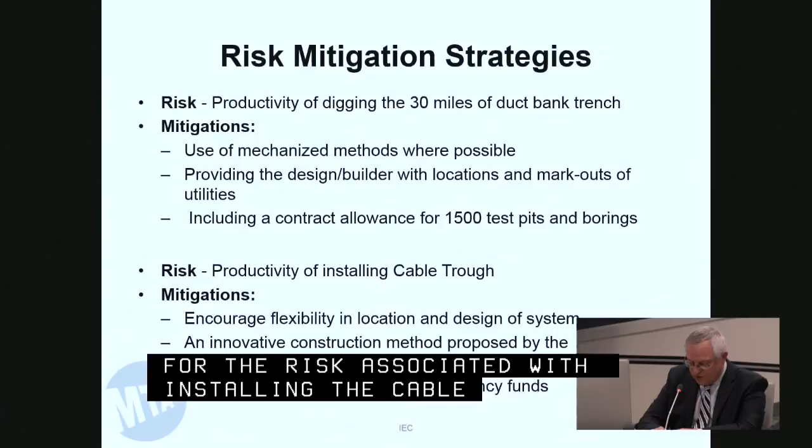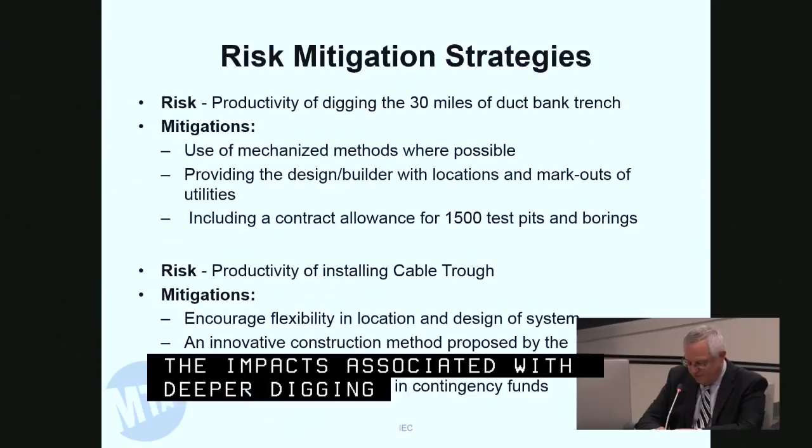The top schedule and cost risks deal with the productivity of digging the trench and installing the cable trough over the 30-mile project limit. In response, Metro-North has developed mitigation strategies. For the trench digging risks: using mechanized methods instead of hand digging where possible, providing locations of known buried power and signal cables in the contract documents, and including an allowance for 1,500 test pits and borings. For the cable trough risks, Metro-North has encouraged flexibility in where the trough is located and how it's designed, recently approving a design builder proposed innovative construction method to minimize impacts from deeper digging. Metro-North also included over $5 million in contingency funds to cover change orders.

For the Harmon Consist shop, with approximately 25% of the design-build contract complete, the project is currently on schedule. All of the early contract milestones, like the closure wall John described, have been achieved. On the financial side, the project is on budget, with no additions to the contract thus far. The IEC agrees with the agency's reporting of schedule and budget.

To prevent this potential schedule delay and cost overrun, Metro-North has taken a number of mitigation steps, some of which were included in Metro-North's presentation you just heard. In addition, the Metro-North project team provides input to the IEC, who prepares monthly updates to the risk logs to track risks and mitigations. Metro-North approved a design builder proposed innovative construction method for installing foundations without using piles. There's a $6 million contingency fund to cover most of the potential increase, and to date, the IEC is satisfied with the agency's continuous risk mitigation efforts.